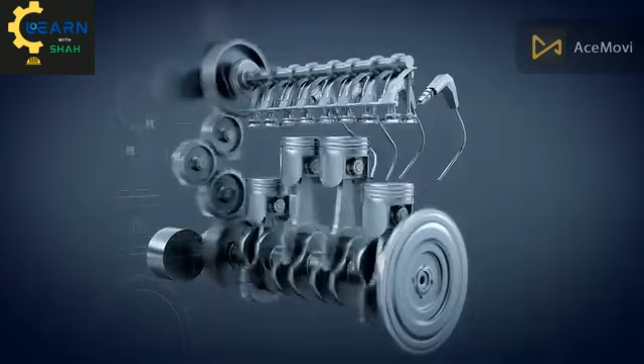A four-stroke engine is an internal combustion engine that converts the chemical energy stored in fuel into a force that powers most cars on the road. This engine undergoes 4 steps, also known as 4 strokes, to convert fuel into turning the car's wheels. Essentially, it burns fuel inside the engine, generating hot gases. These gases create pressure that pushes components inside the engine, ultimately turning the car's wheels.

Before discussing the strokes, let's review the key components of a 4-stroke engine and their functions. To simplify, we'll focus on a single-cylinder 4-stroke engine to explain all 4 strokes.

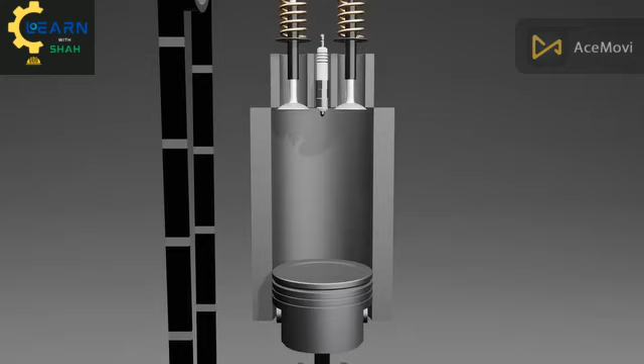The spark plug produces a spark when electricity passes through it. The cylinder contains the piston and is where the fuel-air mixture is ignited. An engine can have 4, 6, 8, or more cylinders, depending on the type of vehicle. Regardless of the number of cylinders, each cylinder undergoes all 4 strokes to generate power.

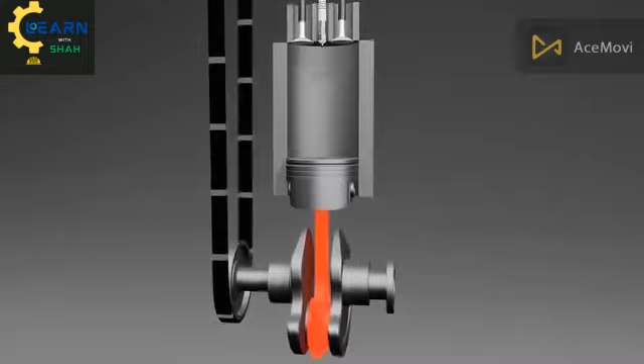The piston is a cylindrical component that moves up and down inside the cylinder, converting the chemical energy from burning fuel into mechanical work. The connecting rod links the piston to the crankshaft and transmits the piston's motion to the crankshaft. The crankshaft converts the piston's up and down motion into rotational motion, ultimately driving the gearbox.

The intake valve opens to allow air and fuel mixture into the engine. The exhaust valve opens to release waste gases from the engine. Both valves are kept closed by springs and are opened by cams that push the springs down as the camshaft rotates. The cam belt takes power from the crankshaft and uses it to rotate the camshaft at the top.

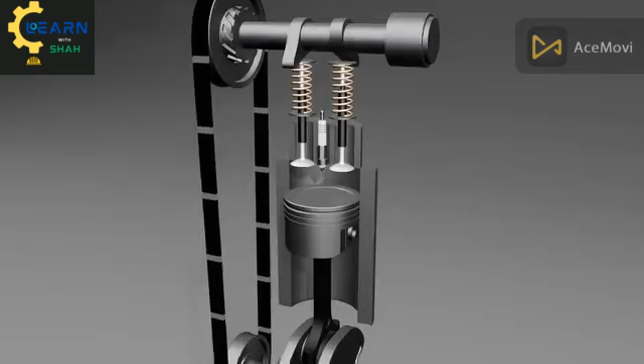Now that we understand the main components, let's examine how they work together in a 4-stroke engine. The 4-stroke cycle begins with the intake stroke. The cylinder is a hollow tube with a piston that moves up and down inside it. During this stroke, the piston starts at the top of the cylinder and is pulled down by the crankshaft.

Simultaneously, the rotating cam opens the intake valve, allowing a mixture of fuel and air to be drawn into the cylinder, as if the engine's taking a deep breath. Before entering the cylinder, the carburetor mixes the right amount of fuel with air. The engine won't run efficiently if the mixture has too much or too little fuel.

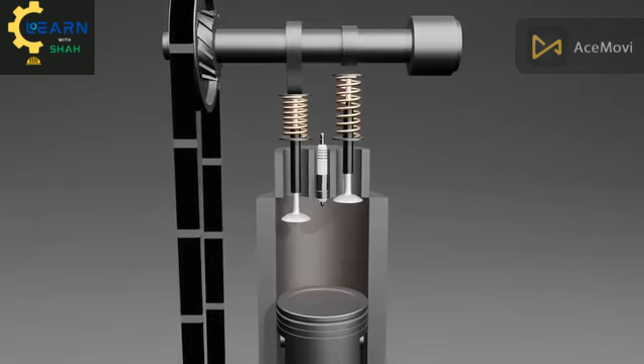The piston's downward movement increases the cylinder's volume, causing the pressure inside to drop slightly below atmospheric level, which helps draw the mixture in. This mixture is critical because it will soon be ignited to create the power needed to drive the vehicle. As the piston reaches the bottom of the cylinder, the intake valve closes, trapping the fuel-air mixture inside.

After the intake stroke comes the compression stroke. At this stage, the rotating crankshaft forces the piston up the cylinder, compressing the fuel and air mixture into a smaller space at the top of the cylinder. As a result, the pressure and temperature of the mixture increase significantly, making it more explosive when ignited.

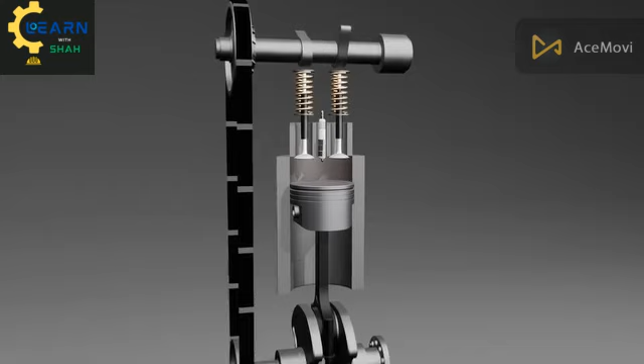This step ensures that when the spark plug ignites the fuel-air mixture, the resulting explosion will be powerful enough to push the piston back down with great force. This sets the stage for the next phase of the engine, the power stroke.

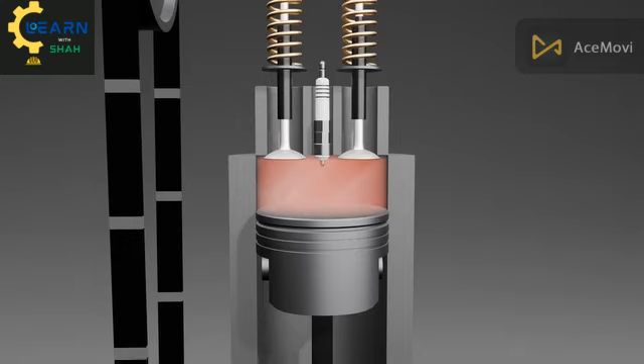The real action happens during the power stroke. At the top of the cylinder, a carefully timed burst of electricity makes the spark plug fire, creating a tiny but powerful spark that ignites the compressed fuel-air mixture and causes it to explode.

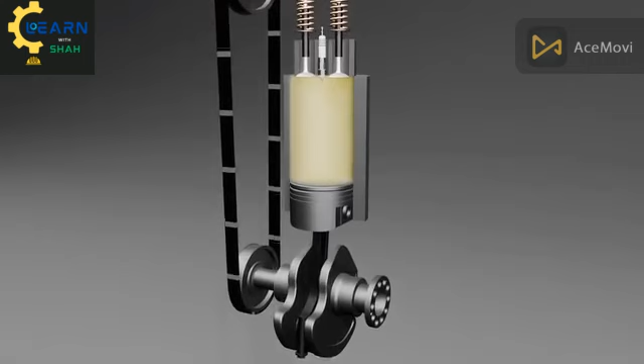The explosion releases large quantities of carbon dioxide and water vapor, which rapidly expand and push the piston downward with great force. This downward motion turns the connecting rod, which rotates the crankshaft.

The crankshaft is connected to the gearbox, which adjusts its rotational speed and torque. This adjusted power is then transmitted to the rear wheels through a drive shaft. This means that the rotation of the crankshaft is what ultimately moves the wheels.

The power stroke is the only one of the 4 strokes that actually produces energy to drive the engine, while the other strokes either prepare for or exhaust the byproducts of the power stroke.

Finally, the cycle ends with the exhaust stroke. After the power stroke, the cylinder is left with carbon dioxide, steam, and pollution from the burnt fuel-air mixture. These gases need to be expelled before the next cycle can begin.

The piston moves back up the cylinder, and this time, the exhaust valve opens, allowing the spent gases to escape through the car's exhaust system. By the time the piston reaches the top of the cylinder again, the cylinder is empty and ready to start the process all over again.

Together, these 4 strokes, intake, compression, power, and exhaust, work in a continuous cycle, happening hundreds of times per minute to keep the engine running smoothly.

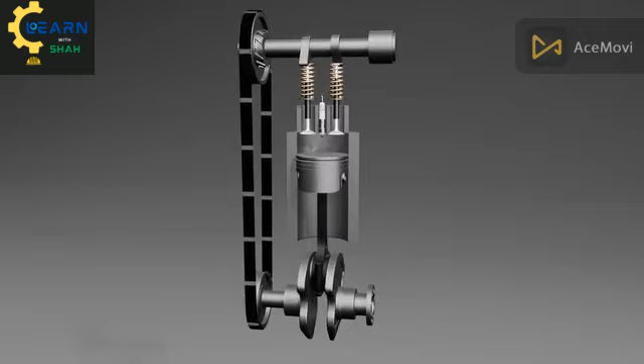You might be wondering why engines have multiple cylinders. If only one cylinder did all the work, the engine would run very unevenly because only 1 out of every 4 strokes is a power stroke. This would make the engine's operation jerky and inefficient.

To smooth things out, engines have multiple cylinders, usually 4, 6, or 8, arranged so that their power strokes occur at different times. Each cylinder fires slightly out of step with the others, so there's always at least one piston powering the engine. This makes the engine run more smoothly and provides a more constant flow of power.

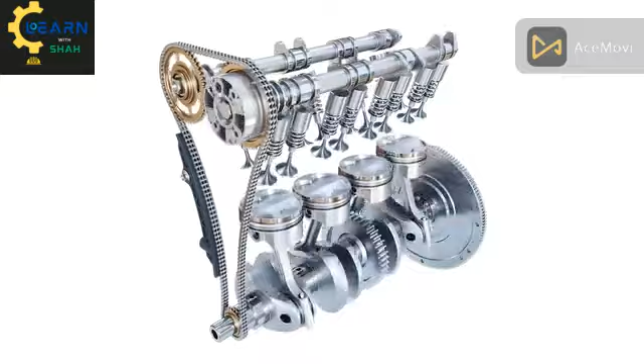Another reason for multiple cylinders is that an engine generates a lot of heat, especially during the power stroke. If an engine had only one big cylinder, it would get too hot, and the fuel might ignite too early, potentially causing damage to the engine. That's why the engine's total volume is divided into smaller cylinders. This allows for better cooling and more efficient operation.

So, that's how a 4-stroke engine works. We hope this animation helped you understand how a 4-stroke engine operates.